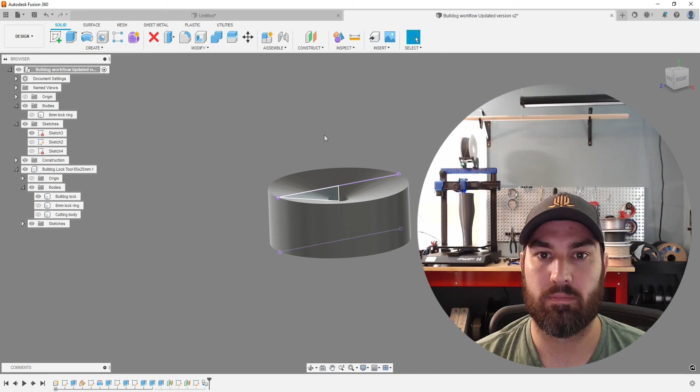Today we're going to be working on locking sockets. This is part 2 of designing and 3D printing a transtibial below knee locking socket.

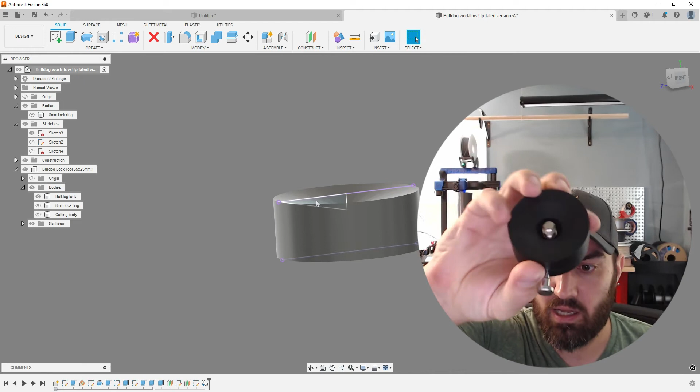You can see we have a dummy here of a Bulldog 3 Gen A lock. It's got a 4-hole pattern on the bottom, and a tapered top to match with the umbrella of liners. It uses pin locking suspension.

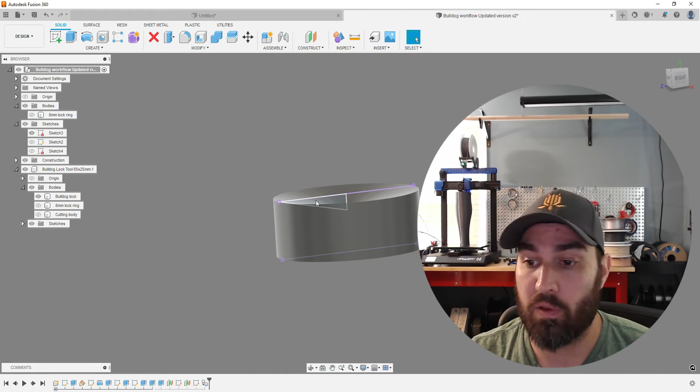And we're going to create the housing for that with all the holes and everything cut into it. There it is. So let's see when that goes in. We've got it all built in. So I don't like to have to drill and cut and do all those things at the end after I print. There's just no need for it when we can design it in. And then you're not running the risk of potentially breaking your print by doing extra work to it.

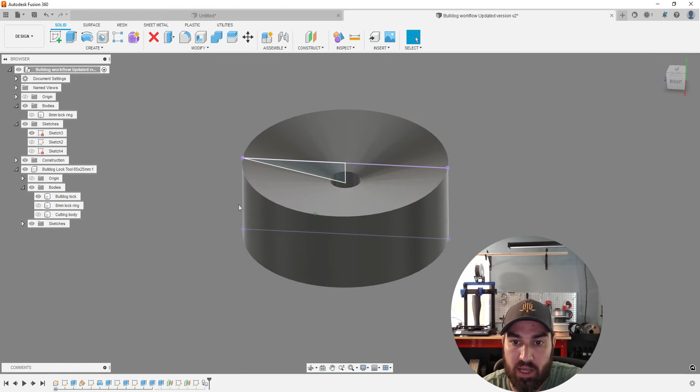So let's get started here. I believe Bulldog may also offer CAD models of some of their parts, so reach out to them. I think I heard that. But this is one quick way to model something like this. So let's start fresh and I'll show you how this works.

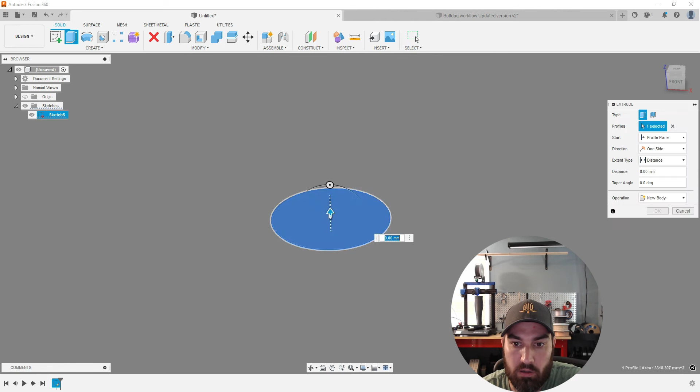We're going to go create sketch and click here. I want to work from the top down. And then we're just going to do a center circle. And these locks are 65 millimeters in diameter. And we'll go finish sketch. And then they are 25 millimeters tall. So just that easy.

We have a very basic dummy of it, but let's also get that taper built in. So if we look here, I'd measured these previously. This sketch, we've got 7 millimeters as the depth of that taper.

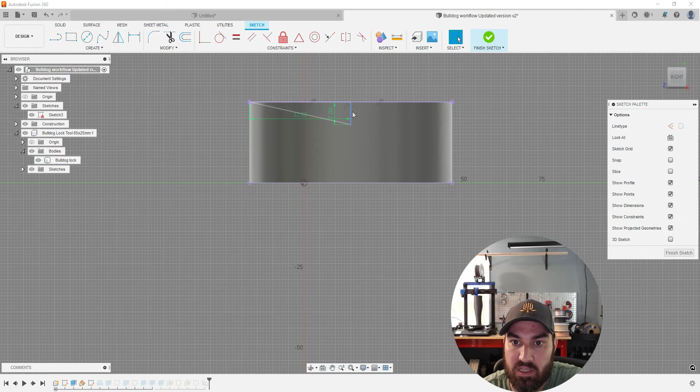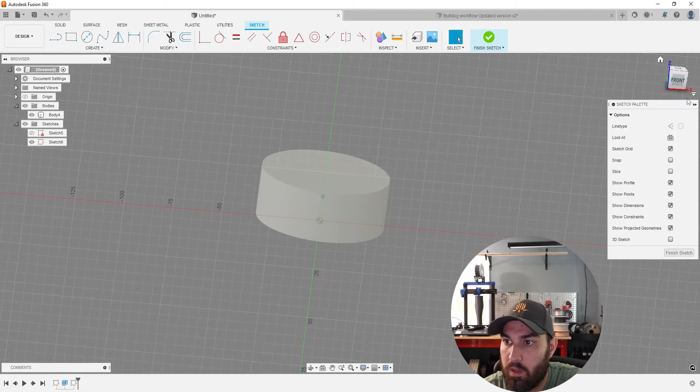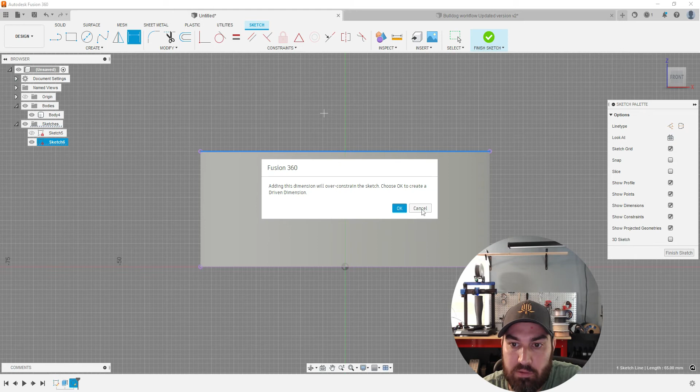So we're going to create another sketch. And by drawing this circle on the center point at the origin, we now can click this plane and know that we are at the center of that. So we're going to add a line. Well, before we do that, let's actually project the lock itself. You can see it added these purple lines, which are derived from that lock geometry. You cannot add that dimension because it's already derived. You can have it there as a reference, but you can't change it.

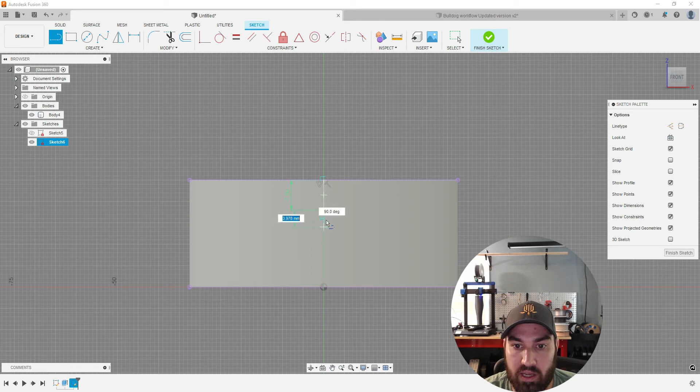But let's add a line, and by having these here, we can now snap. We can hover and snap to the center, and we can come down 7 millimeters and hit enter. The hotkey to add a line is just L. So I can click L and connect that and finish off that shape. Now when we turn off that body, you can see we have a selectable shape. So let's finish sketch.

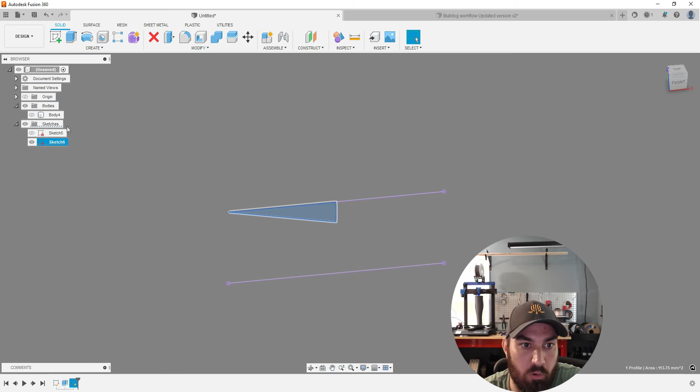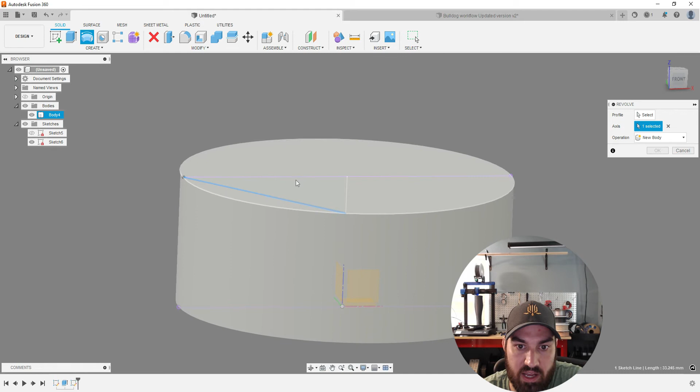And now what we want to do is take that and we want to cut that in a circle. So we turn that body back on with that already selected, because if we don't have that selected, it can be kind of hard to grab that since it's inside of the other body. But the tool we want here is revolve. And you see you can't easily grab that, so turn that off. Just cancel there. So revolve.

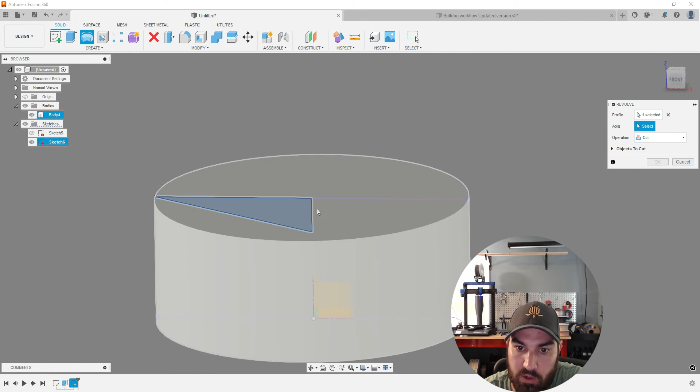There, we've got that. Turn that back on because we need to cut from that body. And then we need to pick an axis. So we could pick this center axis here, and that's what we want to do. You could also pick this line. Either way, let's click that line. You can see that's now going to cut that in a 360-degree circle. You could make it less, that is how the revolve tool works. You can cut or build with it.

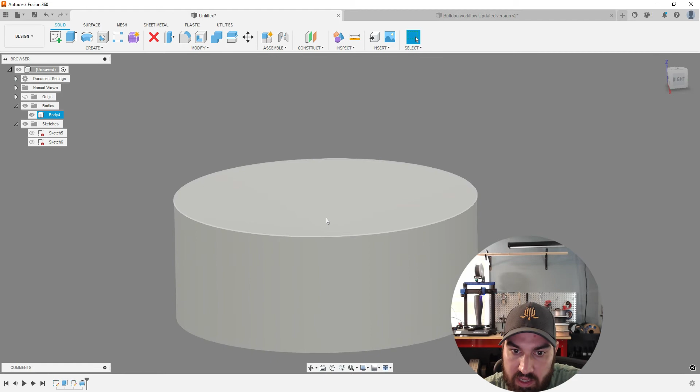And it's a little hard to see here with the rendering, but that is now tapered. You can see it right there.

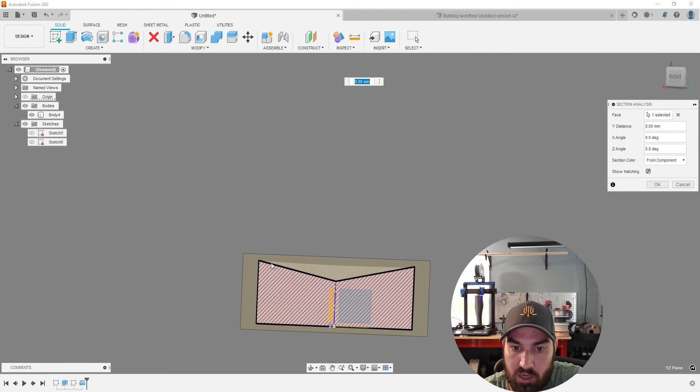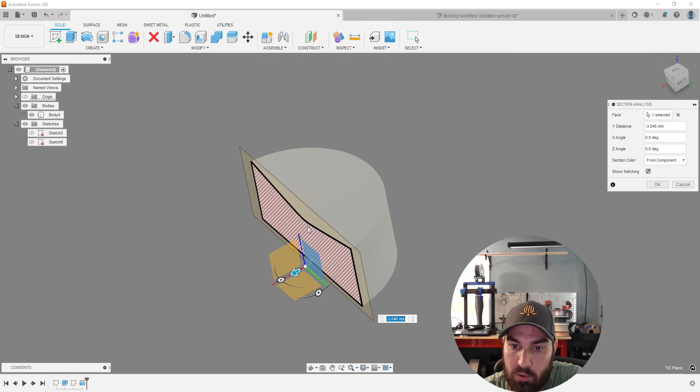You can also do a section analysis. So inspect, section analysis, click a plane, and then you can see what the cross section of any shape looks like. I use this when I'm actually designing sockets to make sure I have my socket on top of my lock properly for a clean transition from the lock right up into the walls of the socket. I don't want the lock to be higher or lower than that and have pressure points. So I will use this section analysis tool to make sure before I go to printing that everything is clean and correct. But I don't actually want to keep that, so I'll just hit cancel. I just use that as a visual tool.

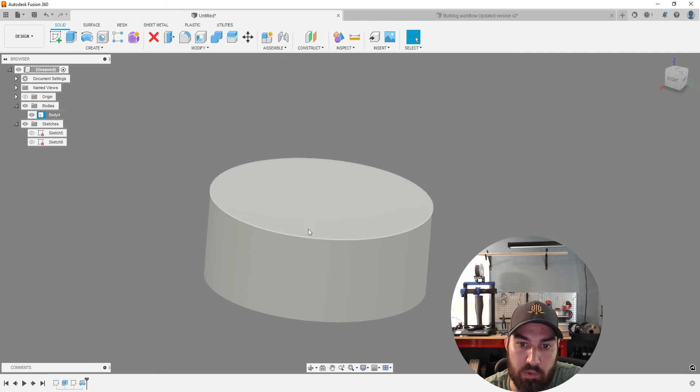So that's a dummy. What you could do is right click there and do save as mesh, export that, and then bring that into Meshmixer, which is what I do. I use this tapered top to actually shape the bottom of my limb in Meshmixer to match this perfectly for the best, cleanest socket design and transitions.

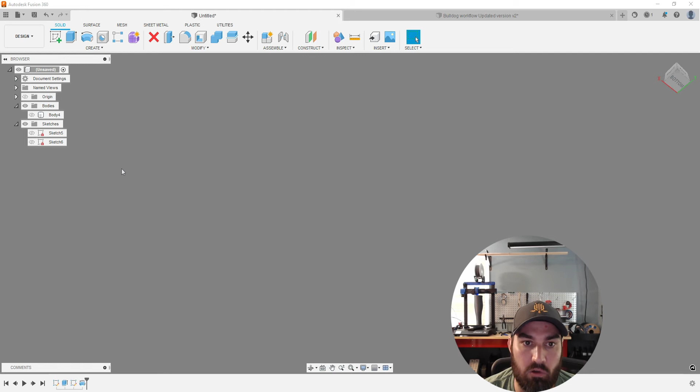But let's also now take that next step and design a housing to go around this, because you can also just use that when you're designing your socket. You don't really have to add the lock. You can also just add the housing. So we're going to work off of that same sketch. Let's go back and edit sketch.

A couple ways to do this: you could add a new circle and come out, and we want this one to be a little bit bigger. This is the housing around the lock.

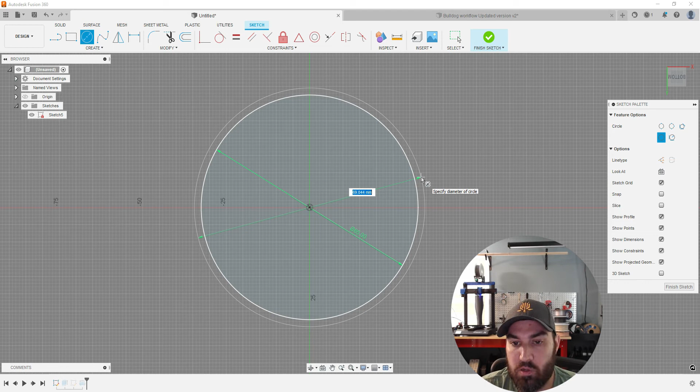So that lock is 65 millimeters in diameter. I want to make this housing 66, so I have a 0.5 millimeter space on each side. That should be more than any potential print error. If you're printing these and find it's too tight, just make this a little bigger. It doesn't really matter as long as you don't get so big that things are sloppy.

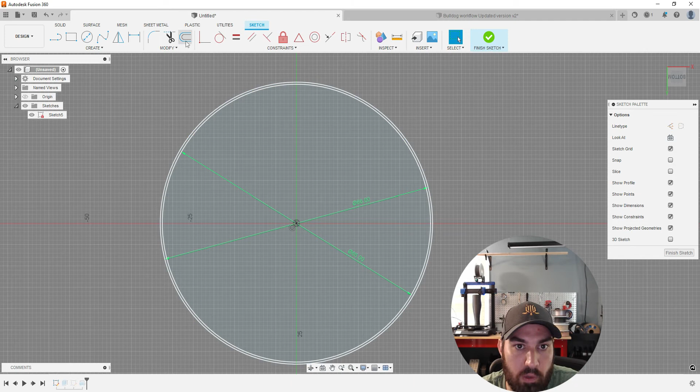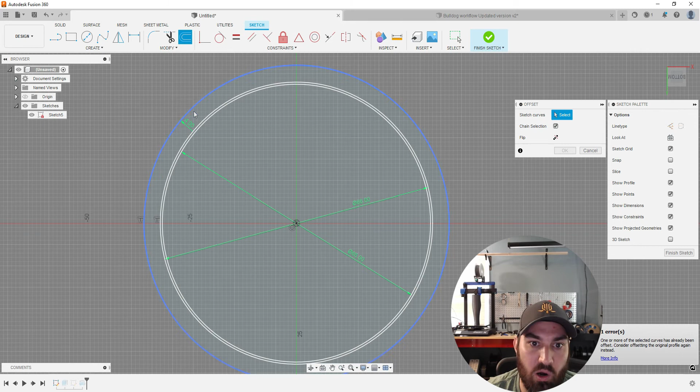Let's start at 66, and then we want a 4 millimeter wall off of that to be the actual wall of the housing in the 3D printed product. So we use this offset tool, click that, and come out 4 millimeters. You could also take things in, but you can't offset something that's already an offset, so you have to click an original circle. Let's finish that sketch and turn it back on so we can see it.

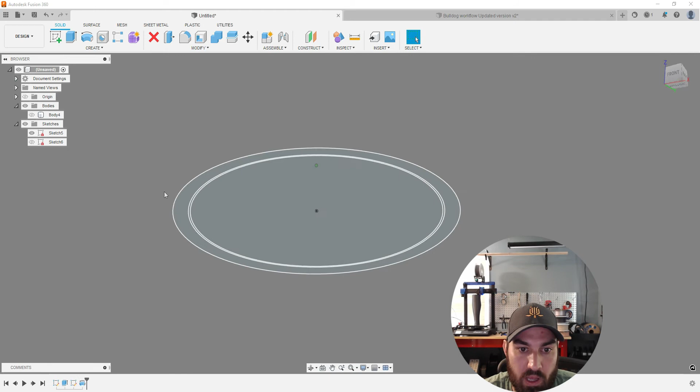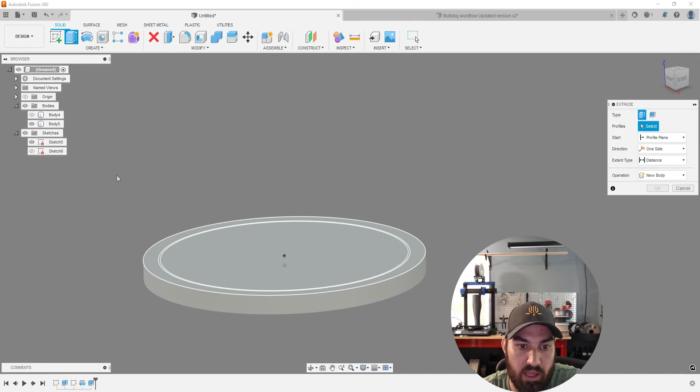We know we have that lock going up. I want to grab all 3 of these sections - there are 3 parts here that can be highlighted - and bring those down 5 millimeters as my base plate underneath my lock. Then I want to grab just that 4 millimeter wall and bring that up 25 millimeters to match the height of my lock.

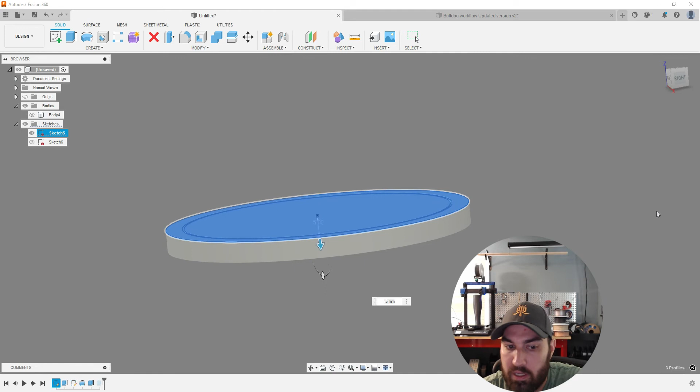So those were new bodies. The first one I did was a new body, and the second extrude was a join because I wanted those to be one piece.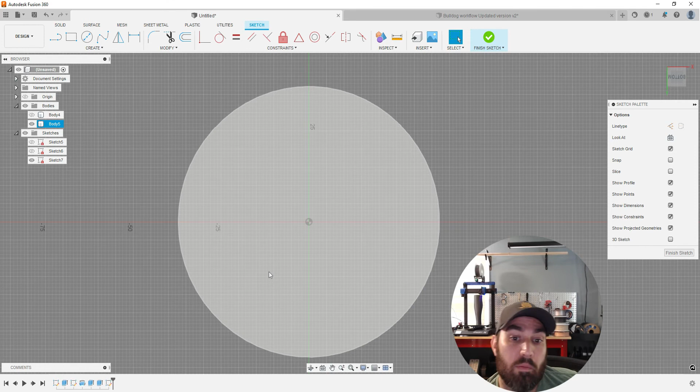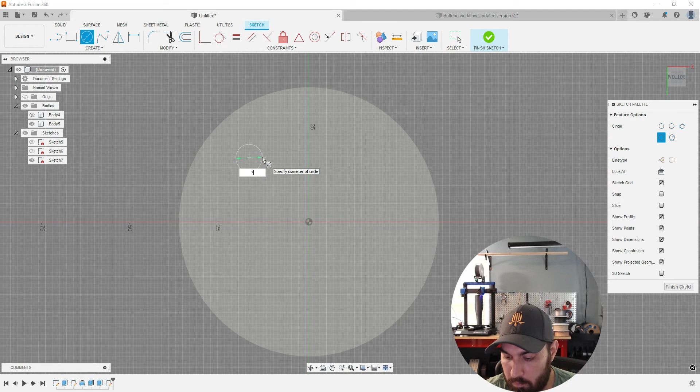So let's come now to the bottom of that lock, click it, and create a sketch. What we want to draw is that 4-hole pattern. The patterns we use in prosthetics are 36 millimeters on center across those holes, and we use 6 millimeter diameter screws typically. When designing for 3D printing, know that when you print, those holes are probably going to come out smaller, so we're going to oversize them a bit - I'm going to make them 7.5 millimeters.

If they're going to be 36 millimeters across, we need them 18 millimeters from the center. So we can click that - you can see right now it wants to dimension there, but if you drag up or over, you can change which dimension you're getting. Let's do 18 there, and come out and do 18 there.

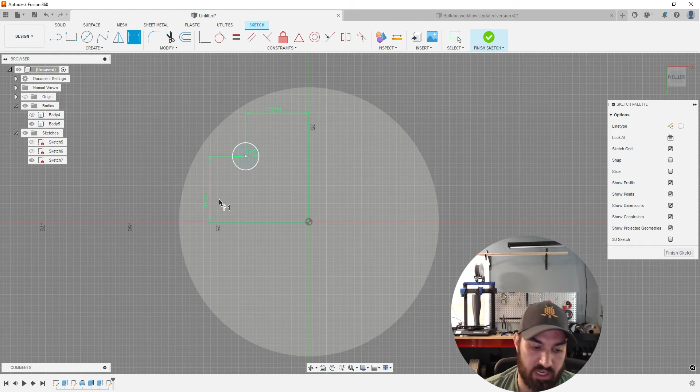So that's one hole. We could do that for all four, or you can do some different things - you can create circular patterns, you can create rectangular patterns. I'm actually going to show you how to mirror.

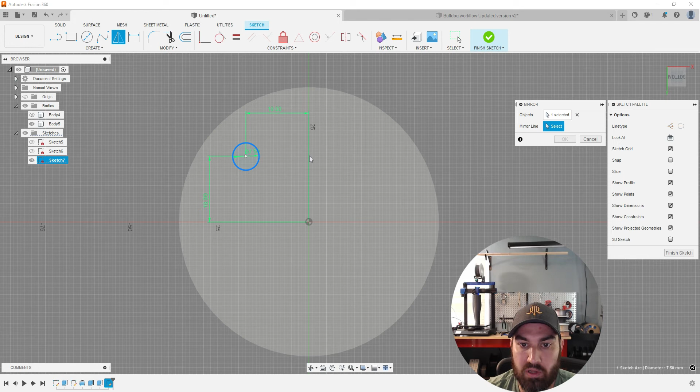We're going to select that circle as our object, and then we need a line to mirror over. Now we can't mirror over these dimension lines, but what we can use in this case is the origin has both planes and the axes, so we can select those axes as mirror lines. See, once we click that, it has now created a second circle and it's put this geometry in.

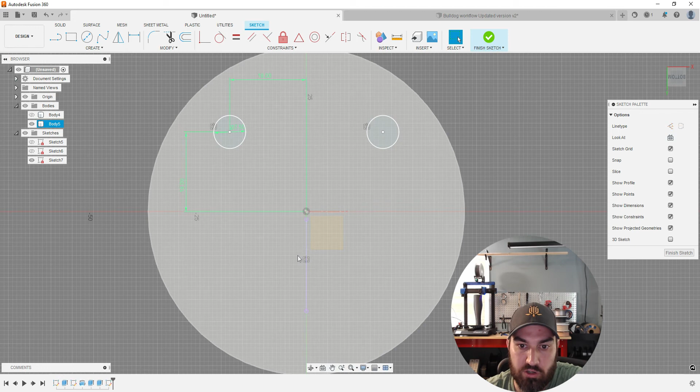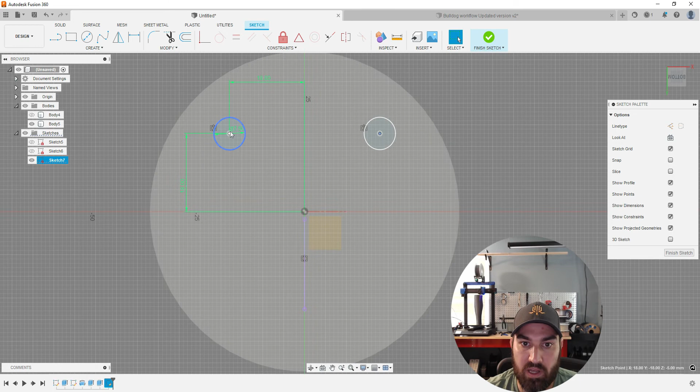It's projected this little line here, and you can see these small things are constraints - that is the mirroring constraint, showing that that is part of that. If you were to delete that line, you lose the constraint, and that can be moved anywhere. Control Z a couple times - let's get that back. Now I cannot move this because it is constrained to mirror from this, but if I change that one, that changes with it.

So one more time here, we're going to mirror again. We're going to do both of these and mirror them over this axis. And now all four of these are connected and derived from this first one. So that's our 4-hole pattern.

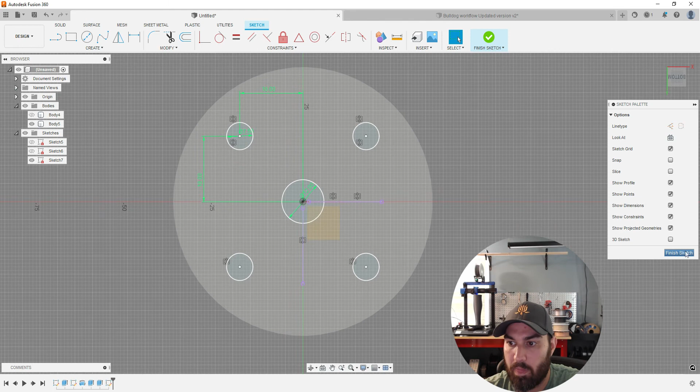Let's put a center hole in. Let's just make that 12 millimeters, oversizing it relative to the pin a little bit, and finish sketch. Now you can see we've got all of these are selectable.

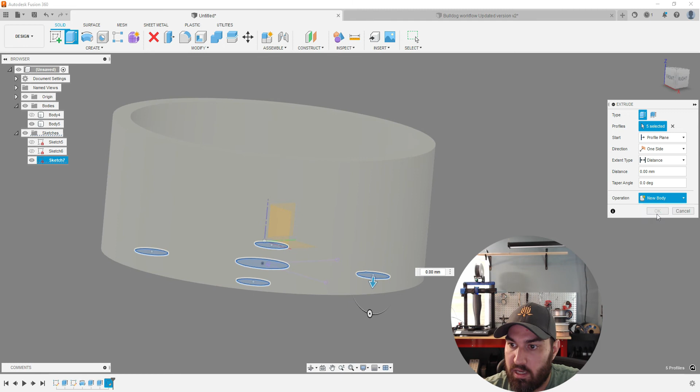So let's extrude, click them - you don't have to hold control or anything here when you're within a tool, you can just start left clicking and adding them on sequentially. We're going to cut, and I'm going to do a through-all, and give it the direction that you want it to cut. You can see we could just pull it up there, but now if we go all, it'll cut through that plane and anything else that might be in its way vertically.

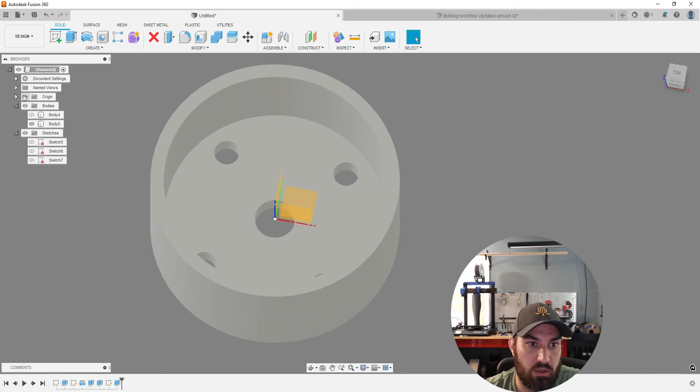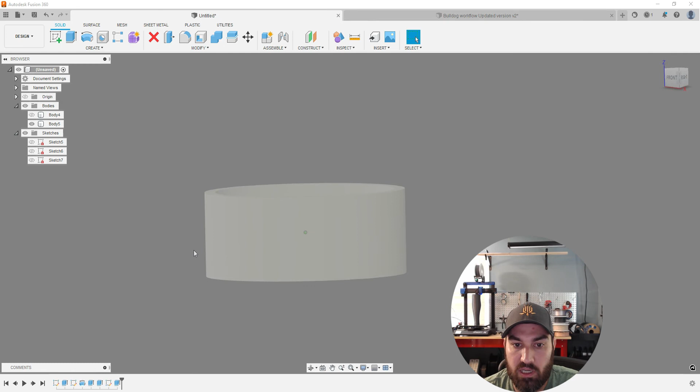So that's now coming together. You can see we would have a lock that would fit in that housing. And the last thing that we're going to need is some sort of hole there for the button. That button is a little over 12.5 millimeters in diameter, and you can see that it basically sits on the bottom, so the bottom of the button matches up with the bottom of the plate.

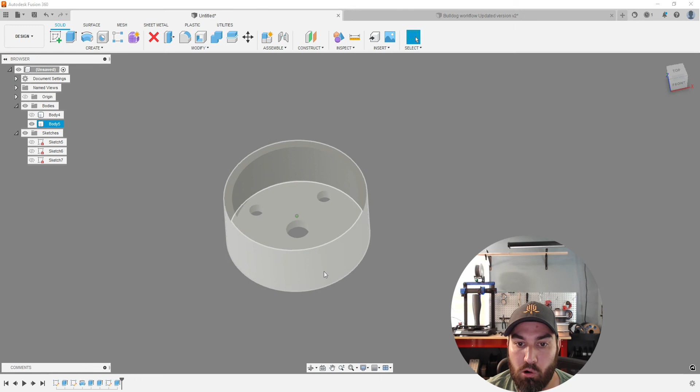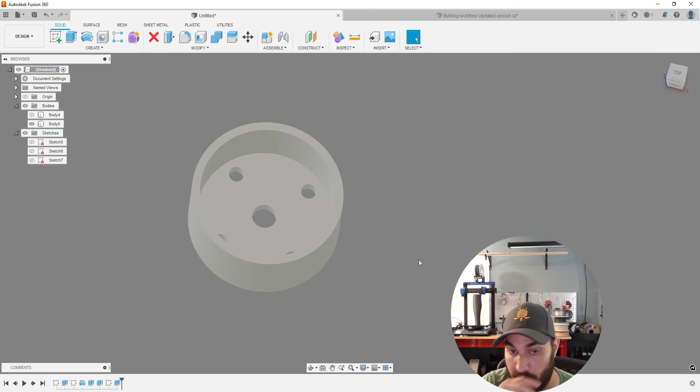At a minimum, we would need a 12.5 millimeter diameter hole, but then that would be really hard to get in and out, so we're going to make this opening quite a bit bigger just to make things easier. To get started, we have to be able to draw the shape we want. We're going to cut a shape through. We have to draw that shape outside and bring it in, or draw it inside and bring it out. So let's do this.

Let's put a plane on the outside, would be one option. So construct offset plane, click the one you want, and you can create a new plane to work on. That would put it if you know what side you want it on, or if something's not in line with an existing plane. There's lots of ways to create planes here.

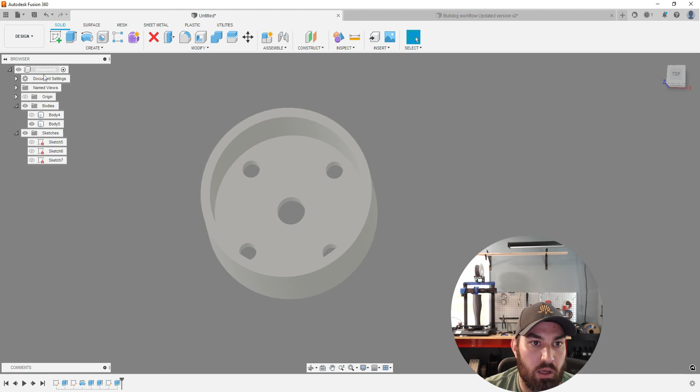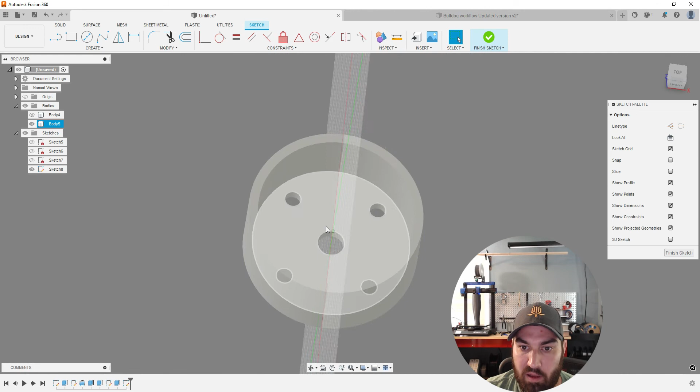In this case, I'm actually going to design it here. Oh, let's back up, Control Z. I think I clicked the wrong one. So I want it on this one. And I'm going to design one shape in the middle that could be cut left or right, depending if it's a left or right limb, if I want that release button medial or lateral. I can choose where to put it.

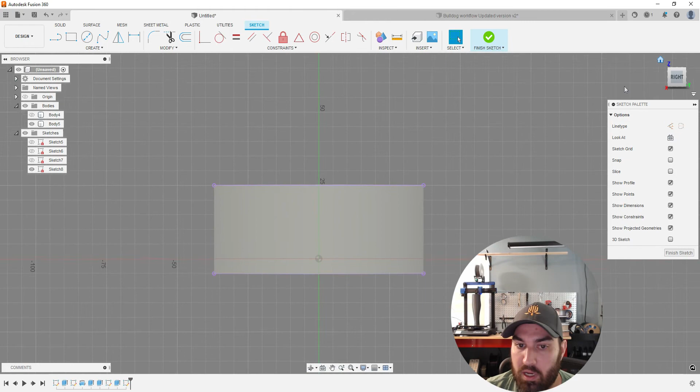So let's grab that and project that shape to start. The other thing I want to do is project this bottom. I want to know where the top of that plate is, so I'll project that as well. You can see now I have 1, 2, 3 lines of projected geometry, and it's actually showing me where the hole locations are too.

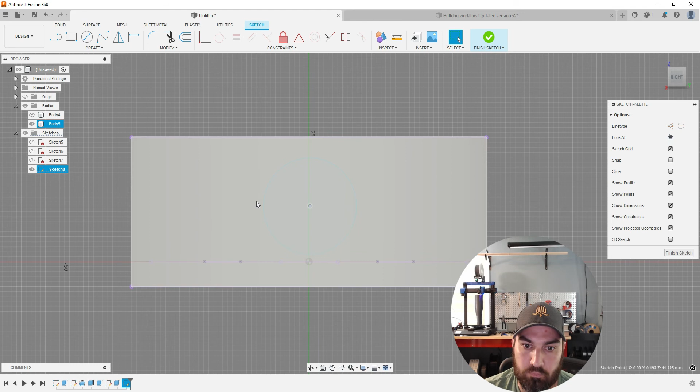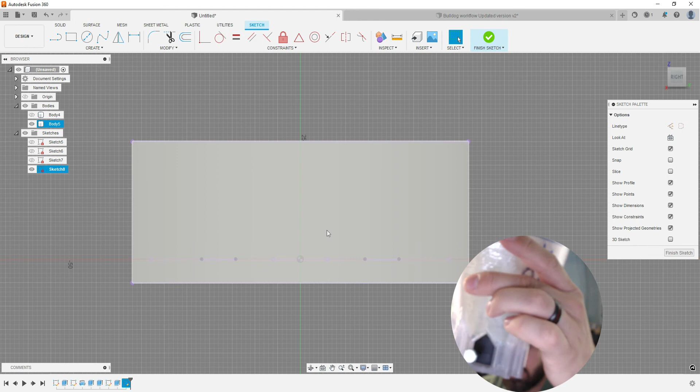So at a minimum, we would need a 12.5 millimeter hole. We're going to go bigger than that. I don't actually like to use circles for things like this, because as that's 3D printing, you're going to get to this top part, and it's going to have to do some sort of bridging here, and that might start to droop filament in. Might not matter, but it could be something you have to come back and clean up later. So that's why I prefer to use things with 45-degree angles, because they print really clean.

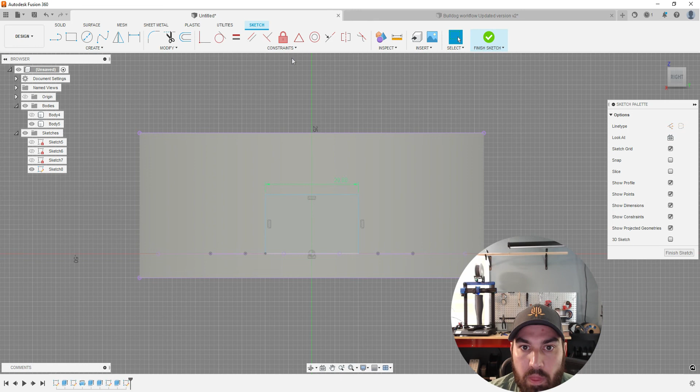So let's start here. We're going to start along this base plane, and I'm going to draw a rectangle. For mine, I have these at 20 millimeters. And then on the constraints, what I want to do is a midpoint. I want that line that I just drew for that rectangle midpoint with this line, I should say. So now it's centered up. So because that's 20, I can't grab these and move because it's already fully constrained.

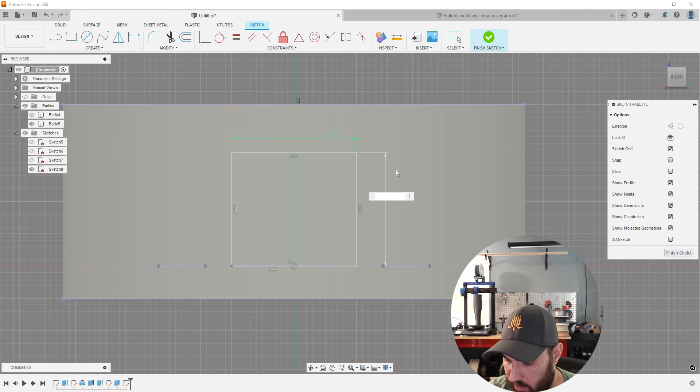What I could do is move that up and down, because this has not been dimensioned or constrained yet. Let's make that at, let's go 13. So bare minimum would be something like that. But now I want to add those 45-degree angles for cleaner printing.

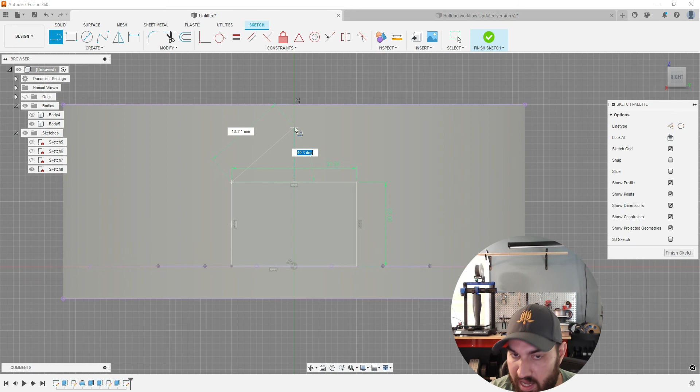So I can come out here. Right now it wants to give me the length, but if I hit tab, I can actually add the angle. And then I can grab and drag that to the center. Actually, I'm going to go a little bit past and show you this tool. Hit L for line. Grab and come out, let's do 135 as the reverse angle.

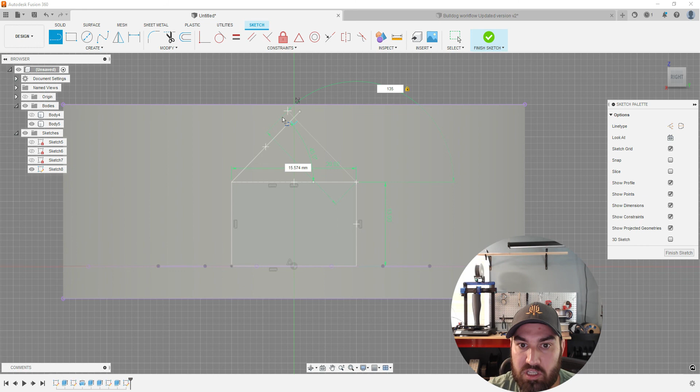And now you can see we have this shape. They're intersecting and crossing over, so we can trim those extra parts away. We can trim right there. And now we have just the shape that I want. I'll finish sketch, and that is what I will cut.

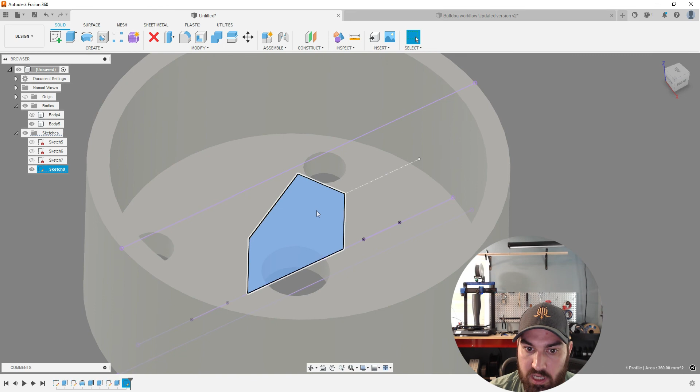So I can grab that and cut that way, I can cut that way. And now you can actually export this housing again to Mesh Mixer, and you could use this top edge to blend Boolean that into a 4 millimeter thick socket in Mesh Mixer. So I'm going to cover a lot of ways to do it. Any of these kind of blending, cutting, joining operations are going to be much better, much cleaner in Fusion 360.

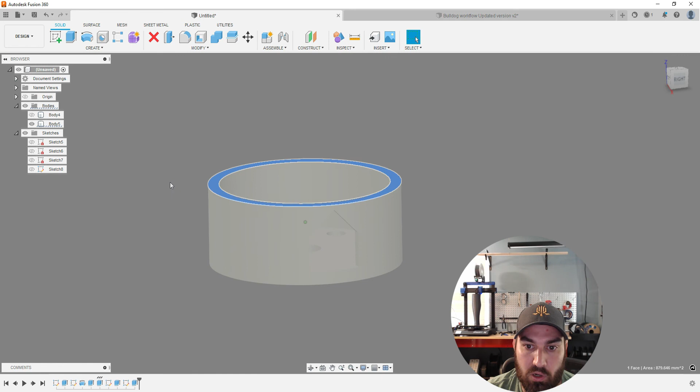So I would recommend learning Fusion 360 for those kind of things, but they can be done in Mesh Mixer. But because you're working with meshes instead of solid dimension bodies, things will blend and get a little bit messy. You might lose some of your dimensions. So just know that there are ways to do it. There's not a best or worst way. It's whatever works for you and your workflow. So we're going to cover a lot of those options.

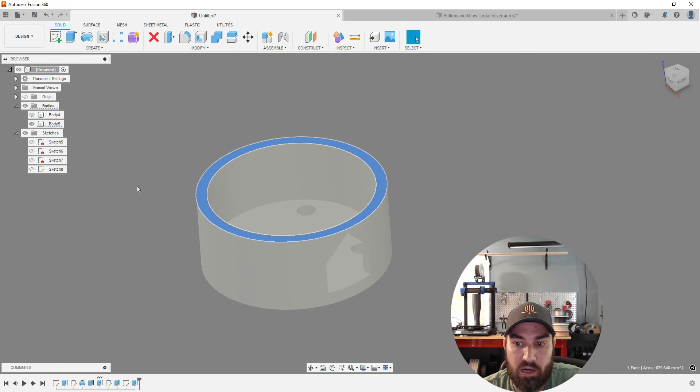So check back for part 3, which is where we'll take some of these things we've made here in Fusion 360. We'll put them into Mesh Mixer, and I will join everything up and show you several ways to make locking sockets with the Bulldog 3 Gen A lock. So thanks for watching, and we'll see you at the next one.